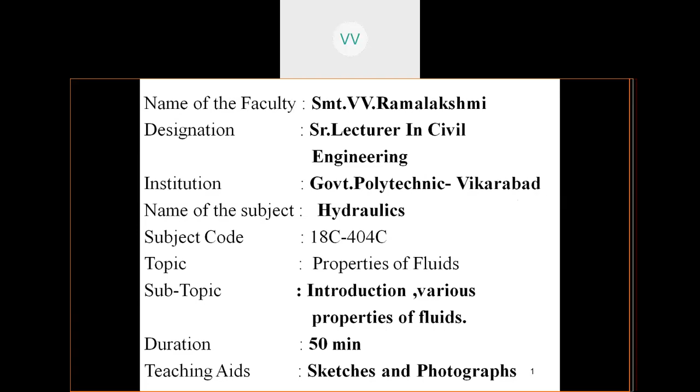Get ready to listen to the new subject of hydraulics. Hydraulics is a Greek word - hydra means water and leaks means study. So we are going to study about water in detail.

As you all are aware, water is available everywhere on the earth, but we have to streamline the water and try to utilize it properly. As a civil engineer, from our civil engineering point of view, we are supposed to take care of the water and use it effectively.

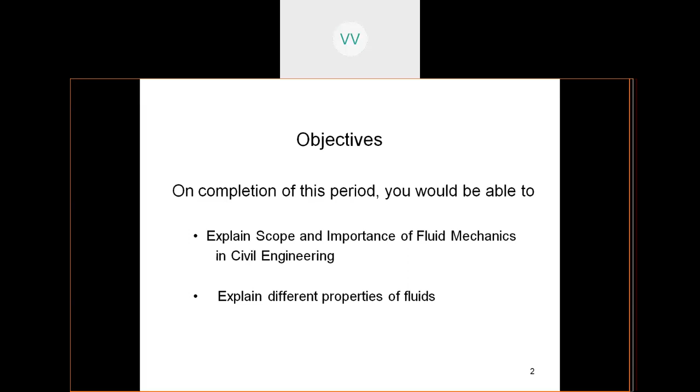On the completion of this period, the objective of the class is that you will be able to explain the scope and importance of fluid mechanics or hydraulics in civil engineering, and the different properties of the fluids. Next we are going to see the introduction to fluid mechanics.

As we are all aware, matter exists in two states - solid and liquid or fluid state. In the solid state, the solids are compact, rigid, and resist shear stress to its capacity, meaning the molecules are closely packed. This concept you already know from your school days in physics - matter exists in two states.

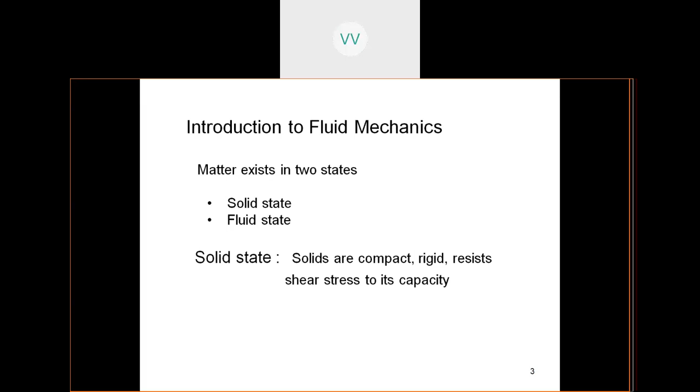Coming to the fluid state, it is a state in which the molecules are farther from each other, and a fluid is something which flows. Liquid is different from a fluid - both have a very slight difference. What you must understand is fluid means something which can flow. A state of fluid is the state in which it deforms continuously under shear stress. So that is the two states in which matter exists.

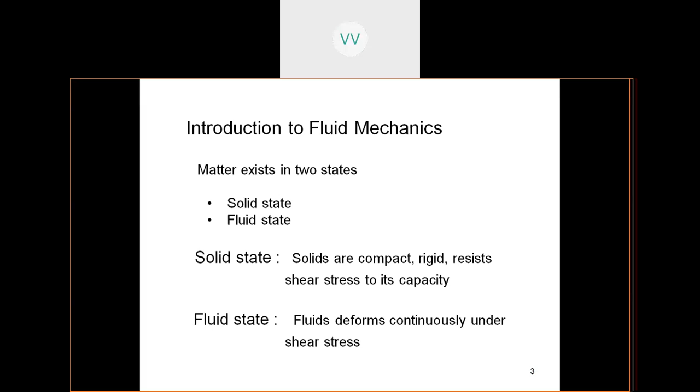Now coming to fluid mechanics - fluids may exist in liquid form or gaseous form, so both liquid and gas can be grouped into fluids. Now, liquids are something which possess definite volume and they are incompressible - that means we cannot compress them, the volume cannot be reduced.

Suppose you take a liquid into a cube and try to give pressure or forces from all sides. Can you reduce the volume of the liquid? Is it possible? No. You must have tried, or if you try also you cannot do it, because liquids are simply incompressible.

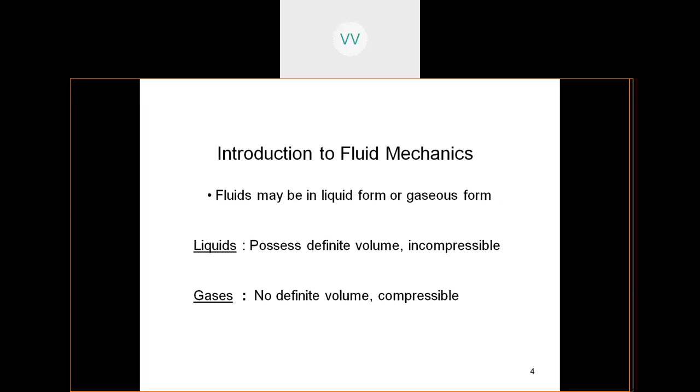Then coming to gases - you have oxygen everywhere, and unless you have oxygen you cannot breathe, but you cannot see it. Gases don't have a definite volume and they are compressible. Suppose you take some gas into a container and try to apply pressure to it - they can be compressed under certain conditions. So this is the basic difference between liquids and gases.

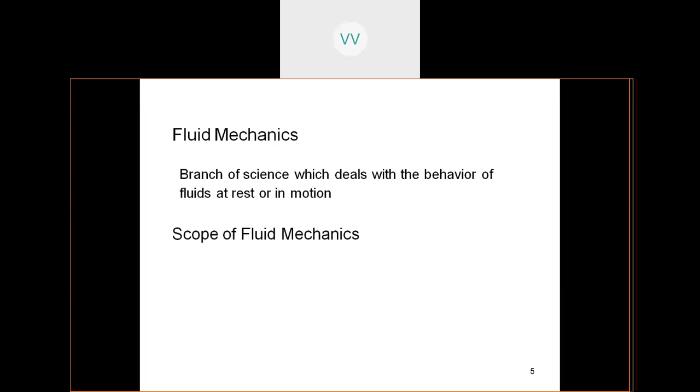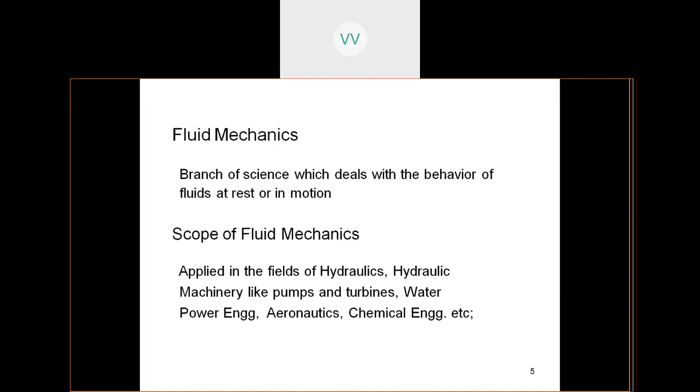Now coming to fluid mechanics - this is the branch of science which deals with the behavior of fluids at rest or in motion. Let us see the scope of fluid mechanics - it can be applied in the fields of hydraulics, hydraulic machinery like pumps and turbines, water power engineering, aeronautics, chemical engineering, etc. These are all the areas in which you have the application of fluid mechanics or hydraulics.

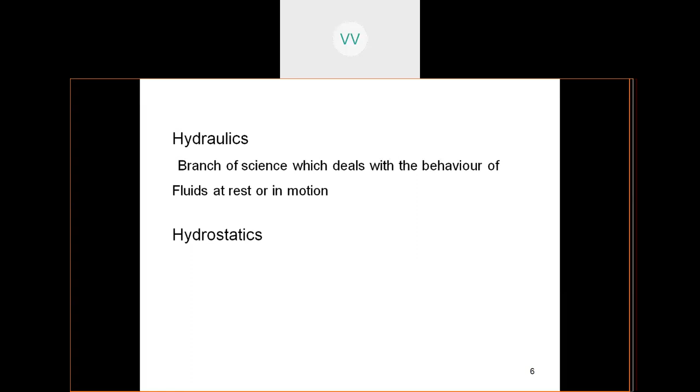So hydraulics, coming to our subject - this is the branch of science which deals with the behavior of fluids at rest or in motion. Then coming to hydrostatics - what is this hydrostatics? Static means something which cannot move, so hydrostatics is a branch of science which deals with the behavior of fluids at rest, when fluids are not going to move, they are standstill.

Then you have pressures - suppose you have the fluid inside the dam, which is getting barricaded by a dam, so it is still, the liquid is at rest - that branch is called hydrostatics. Then when the fluid is moving, like water running into a river, that is hydrodynamics.

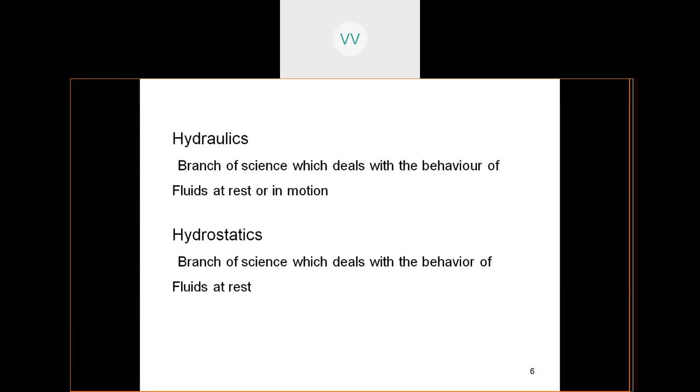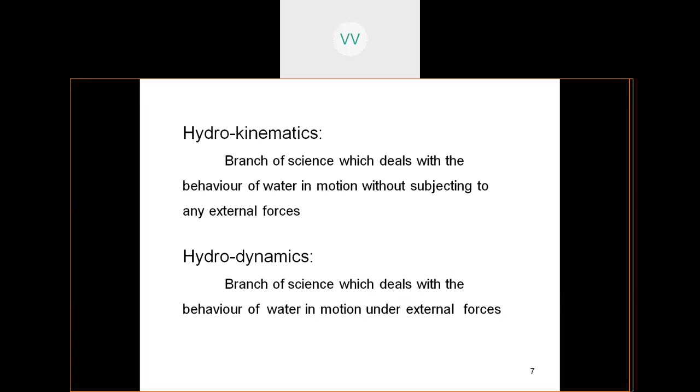Coming to kinematics, that is the branch of science in which the behavior of water in motion is studied without subjecting it to any external forces. That is hydrokinematics. Then coming to hydrodynamics, it is the branch of science which deals with the behavior of water in motion under external forces. So in kinematics, it is not subjected to any external forces, but in hydrodynamics, it is subjected to some external forces. So the effect or influence of external forces will be there in dynamics. That is the difference.

Now coming to the different properties of fluids. Basically fluids have certain properties, and unless we study these properties, we cannot understand the subject of hydraulics or fluid mechanics. Usually civil engineers handle the subject as hydraulics, and almost the same subject is handled by mechanical, automobile or other engineers as fluid mechanics, because the fluid which we deal with is going to be only water.

That is why hydraulics, hydro means water, as I told you in the beginning. For mechanical engineers it can be any oil because they deal with machinery, so they should know the movement of the oil, the viscosity of the oil, or the properties of the oil which is moving into the machinery. That is why in aerodynamics and similar fields, people study fluid dynamics or fluid mechanics. So the subject is a little bit different. From our point of view, we are going to restrict ourselves to hydraulics.

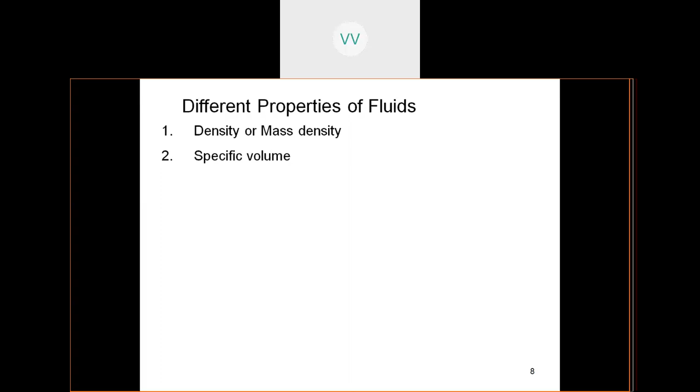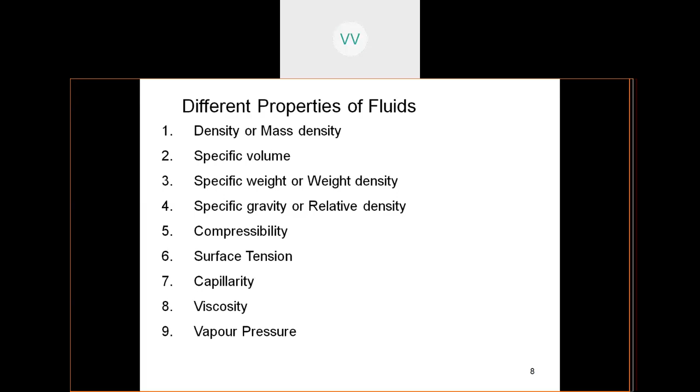Let us see the various properties of liquids. The first property is the density, also called mass density. Next, the specific volume. Then the third one is the specific weight or weight density. Then coming to the fourth one, it is the specific gravity or relative density. Some of these terms you must already be familiar with from physics or chemistry. Relative density, mass density, all these are terminology you have heard in physics or chemistry. Now coming to compressibility, the property of getting compressed. Then the next one is surface tension, and then capillarity, then viscosity, and the last one is vapor pressure. So this is the list of the various properties which a liquid possesses. Let us see them one by one.

So the first one is the mass density. It is represented by the Greek letter rho, a symbol very similar to small p. You must identify and know the terminology, what symbol is used for what. Mass density means it is the mass of the fluid per unit volume. The unit volume can be 1 centimeter, 1 meter, or any other unit like 1 feet. It is the mass of the fluid, that means the physical content of the fluid, per unit volume at standard temperature and pressure. These conditions have to be maintained. It is expressed in mass units, kilograms per meter cube. This is the mass density.

Then the specific volume. Sorry students, here the mass should be in kgs - by mistake the unit shown was kilonewtons, please correct it, it is kgs per meter cube. Meter cube is the unit volume, that is meter into meter into meter - L, B, D, with L in meters, B in meters, D in meters. Volume has 3 dimensions, so meter into meter into meter creates meter cube, and this gives kgs per meter cube. Then the next property is specific volume.

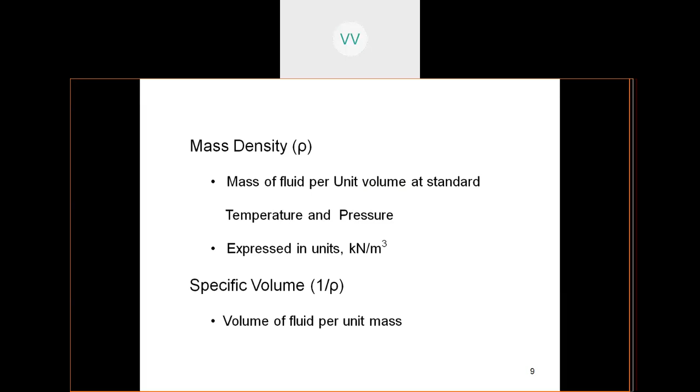Now students, the next property is the specific weight, and this is going to play an important role. Remember, this small w is going to be used in many places in our calculations in the subject of hydraulics.

So what does this small w stand for? It is the specific weight. Now weight means the force by which you are being attracted towards the center of the earth. All of you have your own weight, around 50, 60, or 70 kgs. Weight is always expressed in newtons because it's a force.

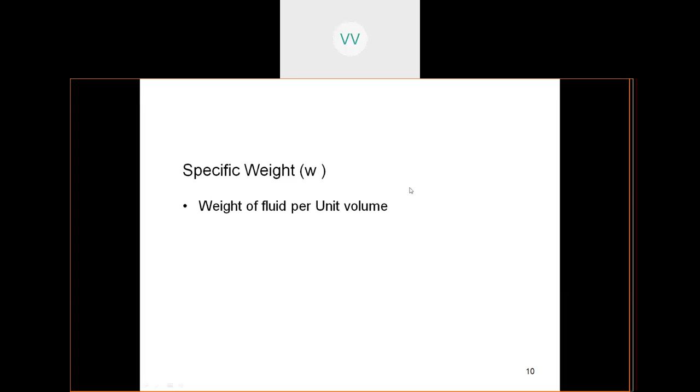Do you all remember Newton's second law? F is equal to ma. So weight is a force, so F is equal to m into a, that is mass into acceleration due to gravity. Here mass can also be expressed as mass density, so mass density is rho into g. So W is equal to rho g. This is one expression by which you can find out the specific weight.

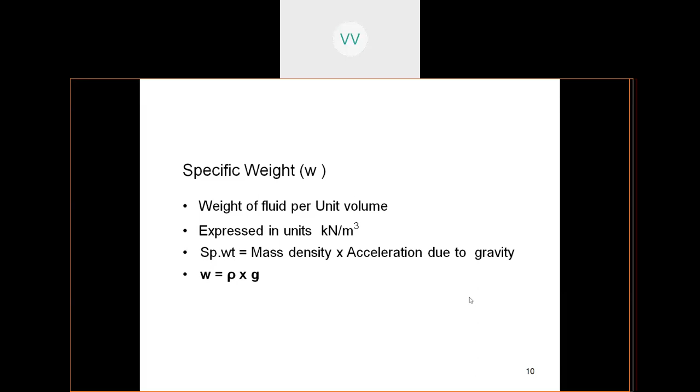Next is the specific gravity, expressed as small s. It is the ratio of the specific weight or density of that liquid to the specific weight or density of pure water at 4 degrees centigrade. That is the temperature at which the weight of water has to be taken, the ideal temperature. So whenever you want the specific gravity of a particular material, you have to compare it with a standard liquid, and the standard liquid available to us is water. So you take the ratio with water.

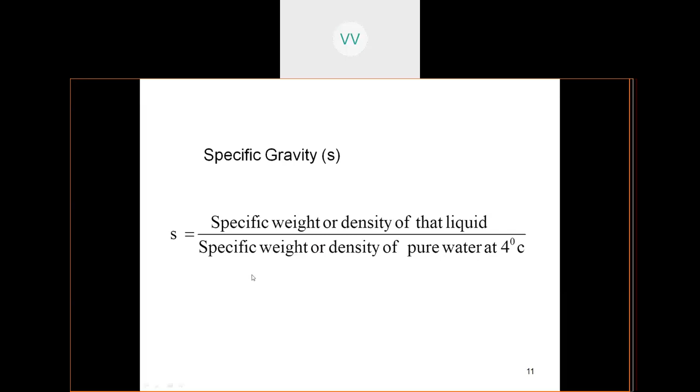Now let us see the standard values for liquids. The mass density rho is equal to 1000 kgs per meter cube, and the specific weight of water is 9810 newtons per meter cube. This value you have to remember, students. This is a very useful value which we will have to substitute in many equations in fluid mechanics or hydraulics. This value for water is a standard value, so you must remember it.

Next, mass density: this is 1000 kgs per meter cube. Then the specific gravity of water, S, is equal to 1, because when you compare the specific weight of a liquid with the same liquid, it is 1. Specific gravity of water is 1 gram per cc, you can take.

Then the specific gravity of mercury, because mercury is a heavy liquid. Usually you find mercury in thermometers, and also in mercury lamps. Inside the thermometer, for finding out temperature, we usually use it to get to know the outside room temperature, which is usually around 27 degrees centigrade. The specific gravity of mercury varies from 13.5 to 13.6. Usually for our problems we will take the value of 13.6.

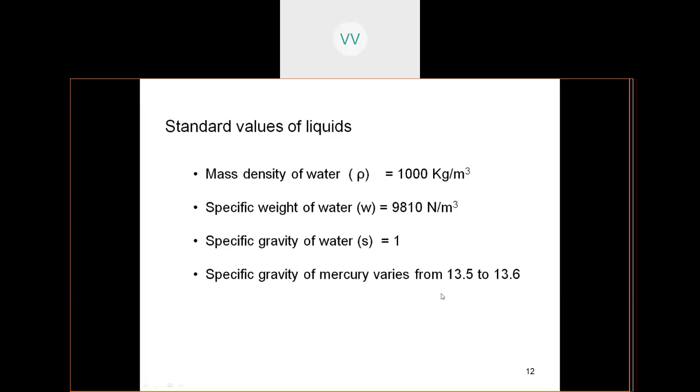Now let us go to the next property of the fluid, which is compressibility. It is very important - air is compressible. If you gather air and put it inside a box and close it, you can try to apply pressure and see, like a balloon. When you blow air into a balloon and tie a rubber band or thread, you can fly it up. So you have tried to compress the air and put it inside, and we see how the air is going to react - it will just fly because it is lightweight. So when coming to the property of compressibility, air is compressible.

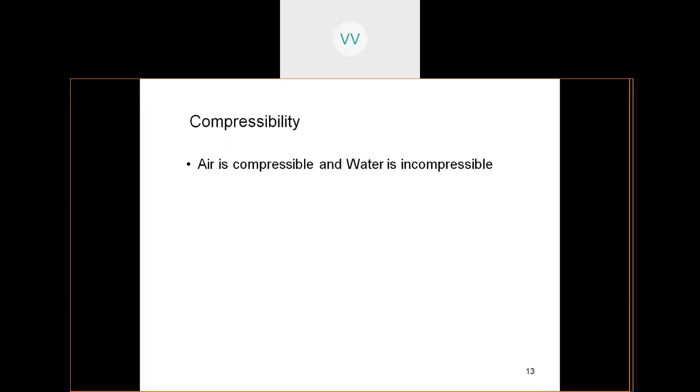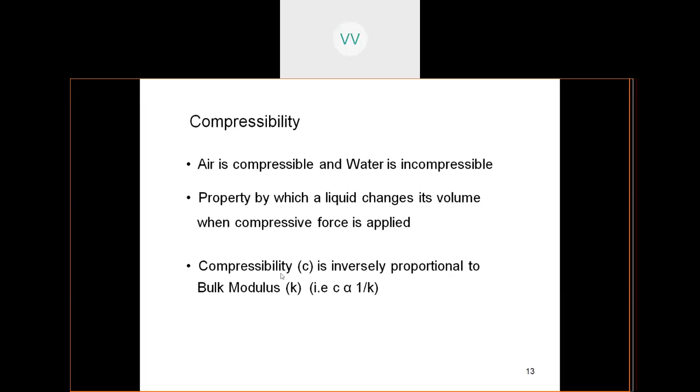Coming to water, water is incompressible. You just cannot compress water or try to reduce its volume by applying pressure. So let us take it for granted that water is incompressible. The property by which a liquid changes its volume when compressive force is applied is called compressibility. Compressibility is inversely proportional to the bulk modulus, which is related to volumetric change. So compressibility, small c, is proportional to 1 by k - when it is inversely proportional, you write it as 1 by k.

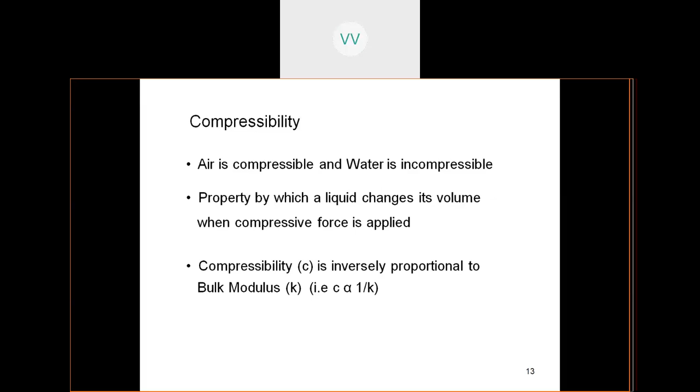So now let us see what is this bulk modulus. The bulk modulus K is equal to the ratio of increase in pressure per unit change in the volume per unit volume. So increase in the pressure, which is divided by the change in volume per unit volume. dV, small dV is the change in the volume, and unit volume is small v. So K is equal to dP by dV by V.

So dV by V is the volumetric strain, and this is the change in the pressure. So that is how when you apply pressure, you will have a small change in the volume. That change in the volume per unit original volume is the volumetric strain. So students, this is a relative term.

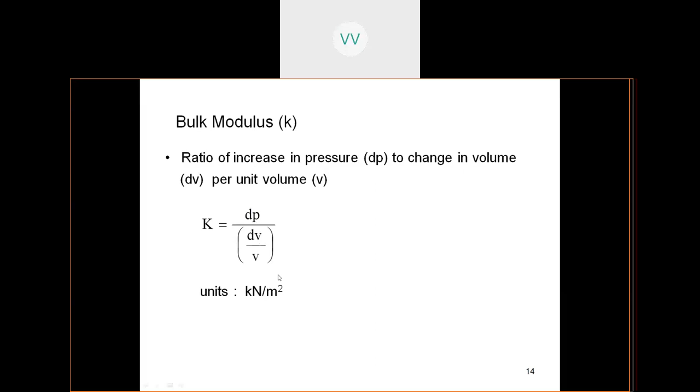Now pressure by volume: this is kilonewtons per meter square. The change in the volume is meter cube, and the original volume is also meter cube. So meter cube by meter cube, the unit gets cancelled off. So you remain with the unit of pressure, which is force per unit area. So here comes your units, kilonewtons per meter square. So the denominator unit is not going to reflect in your bulk modulus.

Another question which will come to your mind is, why does mercury, whose symbol is Hg, not wet the surface with which it is in contact, like glass? If you put mercury into a glass tube and remove it, it is not going to touch the surface of the glass. The same is not the case with water, whereas water wets the surface. Suppose you take a glass tube, put water inside and then pour it back out, you'll see some droplets sticking to the wall of the glass. So why does this happen for water and not for mercury? What property is associated with this phenomenon?

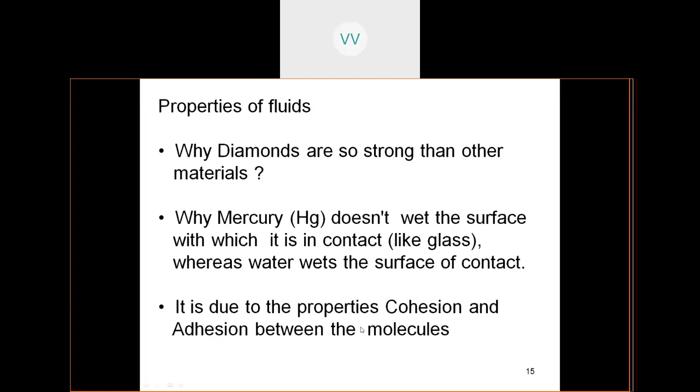Coming to liquids, the same terminology is applicable between the molecules of liquids. So let us see these two terms. In the properties of liquids, let us see adhesion: it is the property of the liquid by which the molecules of one liquid attract the molecules of another liquid or solid in contact with it.

Adhesion means sticking. So when you put water, the water molecule is different and the solid molecule, like the side of the wall of the vessel, is different. These two get attracted towards each other. So there is force of attraction between the liquid's own molecules and between liquid and solid molecules. This force of attraction, or this property of the liquid, is called adhesion.

Then coming to cohesion: it is the property of liquids by which molecules of the same liquid get attracted towards each other.

So suppose it is water molecules, two water molecules get attracted towards each other in the same liquid. This property is called cohesion. If it is different liquids, it is adhesion. But if it is the same liquid, it is cohesion.

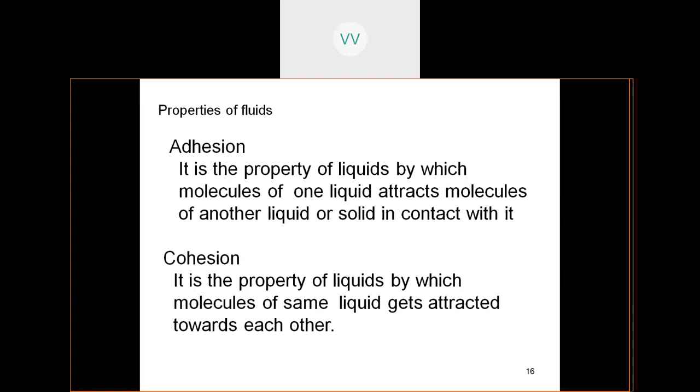Because of these two properties only, you have many phenomena associated with them. So let us again question ourselves. There are a few questions we'll have to think about.

So why does a drop of water assume the shape of a sphere? Whenever you see rain droplets coming down in the rainy season, you see them falling almost one by one drop. So how are they forming? How are they getting that shape? Because water has some property, otherwise it cannot take that shape, like a bundi, like the bundi of a laddu. So how is it getting formed in nature? God has created all these things, everything forms naturally. So what is the property behind it?

Let us see another question, students. Why are small insects able to skate across the surface of a pond? They are not swimming, because they are lightweight. Suppose you see a dry leaf on the surface of the water without sinking, or some small objects are able to just stay on top of the liquid. So how are all these things happening?

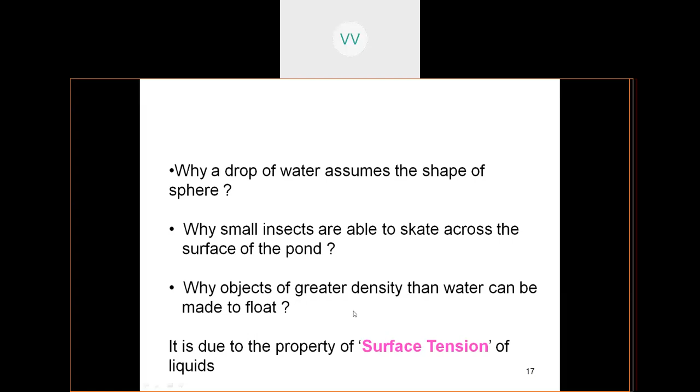This is another new property which we are going to learn about. Because of all these questions — water droplets forming, small insects skating on the surface, and objects of greater density than water made to float — it is all happening because of the surface tension of liquids.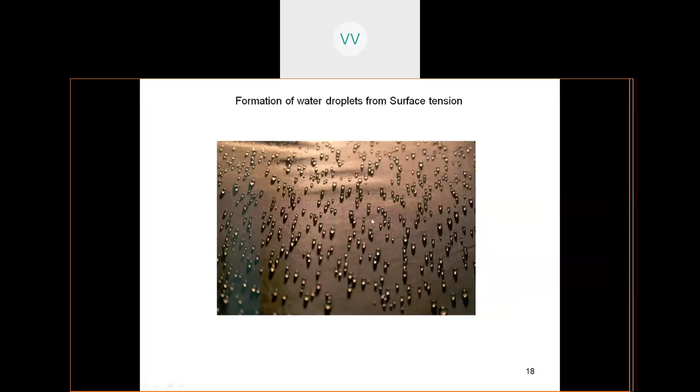Now let us look at this picture showing the formation of small droplets due to surface tension. Water droplets are formed because of surface tension. On a surface you can see all these small and big water droplets. This shape, this look, is very magnificent, and this happens in our day-to-day life. We see this situation when water is in the form of droplets. So because of surface tension only, water can take this form.

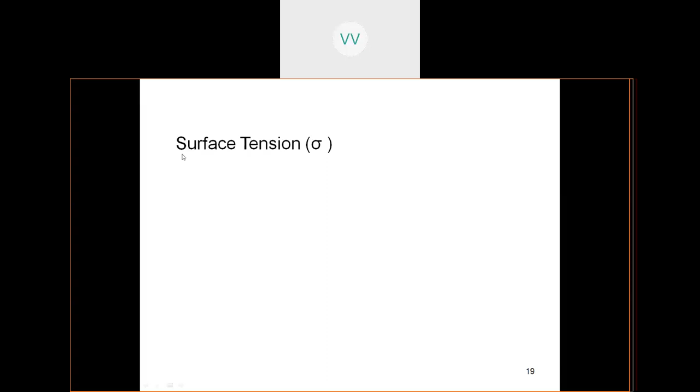Next, let us see, students, what is this surface tension? We have seen different types of tensions. In engineering mechanics, you have seen tensile force, which elongates a body. Because this tension is created on the surface, it is called surface tension. It is defined as the tensile force acting on the surface of the liquid per unit length — let it be 1 meter, 1 centimeter or 1 foot. This is the surface tension, represented by the symbol sigma.

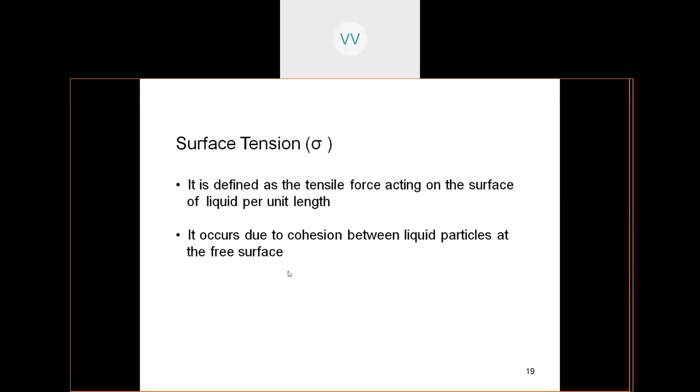Now, why does it occur? It occurs due to the cohesion between the liquid particles at the free surface. Now I'm going to give you a view of the molecules, what is actually happening internally. You'll be able to visualize it by looking at this picture.

The surface tension of liquids decreases with the increase in temperature. Suppose you take water — when you boil it, as you increase the temperature, the molecules scatter. So the elasticity or force on the surface of the liquid lessens with increasing temperature. When the temperature increases, because of the heat, the molecules separate and scatter. So the surface tension of liquids decreases with increase in temperature. Remember this concept — it is inversely proportional.

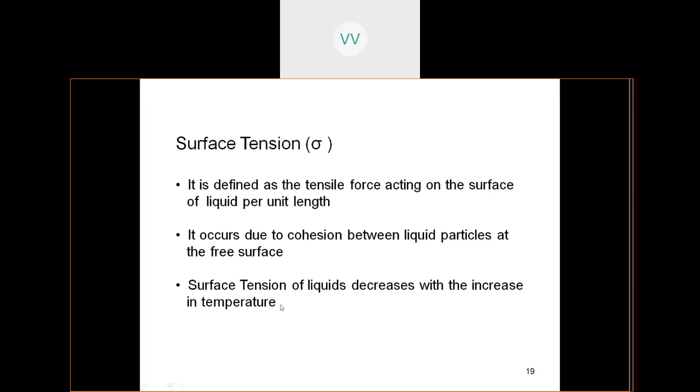Now let us see the phenomena of surface tension. Look here, this is a container, and this is the top liquid surface. So this is the surface.

Consider a molecule A which is inside or under the top, inside the water. It has forces in all directions, see the 8 directions you have forces. So this molecule can attract any molecule in and around this area.

Now coming to this surface, at the top side you don't have anything. There is atmospheric pressure, it is open, the top liquid surface is open to the atmosphere. So what is happening? You have forces of attraction only to the side and the bottom, not to the top. So here this is one side and this is the other side.

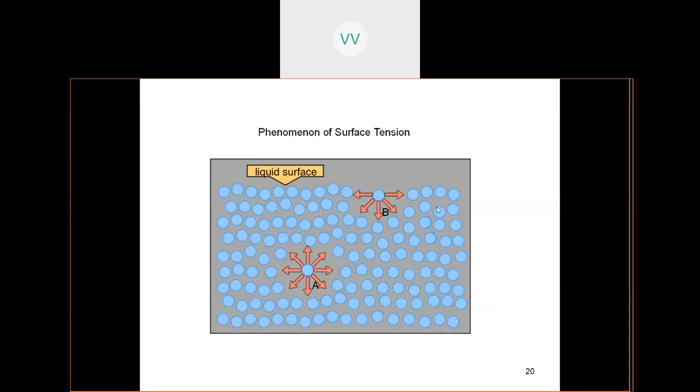This molecule is being pulled by forces on either side, that is, it is under tension. Because this molecule exists on the top liquid surface, this force is called surface tension. Is it clear, students? So you consider one molecule inside and one molecule on the surface, and both these molecules have different forces. It is clear from this picture, and you can explain the concept with the help of a sketch like this.

Now coming over to surface tension: the magnitude of the force per unit length of the free surface will have the same value as the surface energy per unit area. So surface tension is expressed in Newton per meter, that is force by length, Newton per meter.

Now let us see the application of surface tension on a liquid droplet, how it is formed. Let sigma be the surface tension of the liquid per unit length in Newton per meter. Then small p is equal to the pressure difference between inside and outside of the droplet. So Pi is the pressure inside, which is more than the external pressure Po. This is the bubble, and if you take the semicircle, half of the bubble, at the surface.

If you take half the surface, you have tension towards the bottom. So the internal pressure acts downwards and keeps the bubble in spherical form. Because there is more pressure inside and less pressure outside, the film is going to be formed and sustained.

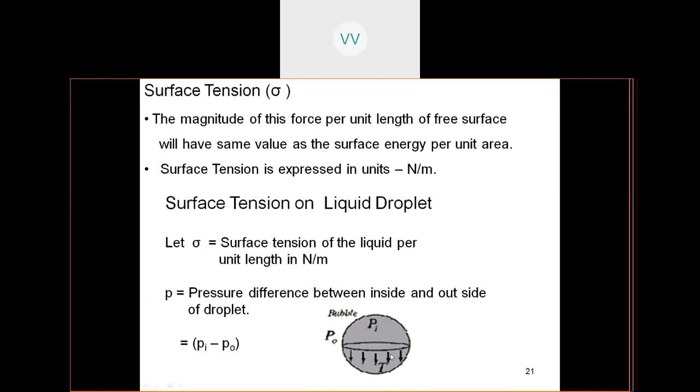Look here, this is the phenomena or concept behind it, this is the tension. Now under equilibrium conditions, the tensile force due to surface tension acting around the circumference of the cut portion is sigma into pi d, because it acts around the circumference, you take the circumferential length, that is the perimeter, pi into d. And the pressure force is acting around the area, that is the cross sectional area, pi d square by 4 into small p.

So this inside force has to balance the cut portion. Sigma into pi d is equal to small p into pi d square by 4. So p is equal to, pi gets cancelled and one d gets cancelled, and you land with p is equal to 4 sigma by d. This is the equation for the pressure inside a droplet.

This is the surface tension on a liquid droplet, and now the surface tension in a hollow bubble or soap bubble will have two surfaces in contact with the air. If it is a hollow bubble, there is the internal circle and the external circle, so two circumferences are there, it is like a ring.

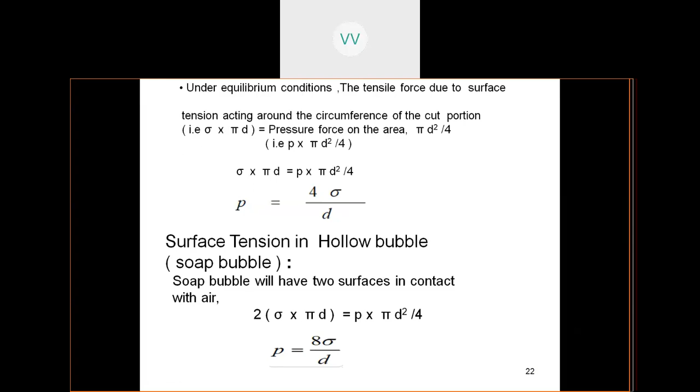For droplet, it is 4 times the surface tension by d, and for hollow bubble, because it is hollow, there is an internal diameter and an external diameter. Because double the area is exposed, we take it as 4 to 8 times. So bubble is 8 times sigma by D.

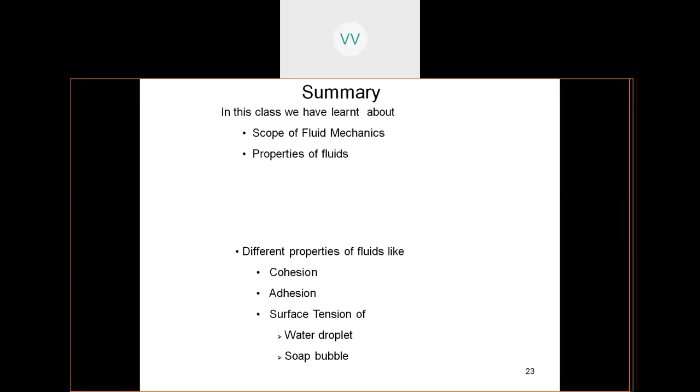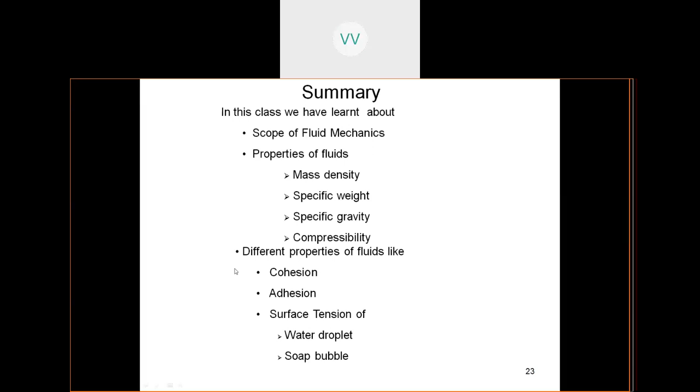Now let us see a few questions in the quiz. Specific volume is the reciprocal of: mass density, specific weight, compressibility, or specific gravity. What is the correct answer? The answer is A, mass density.

Then, the specific gravity of water at standard temperature - how much is it? 0, 1, 2, or 3? Specific gravity is a comparison between the specific weight of a liquid and that of standard water. So when comparing water with water, you get 1. So the answer is B.

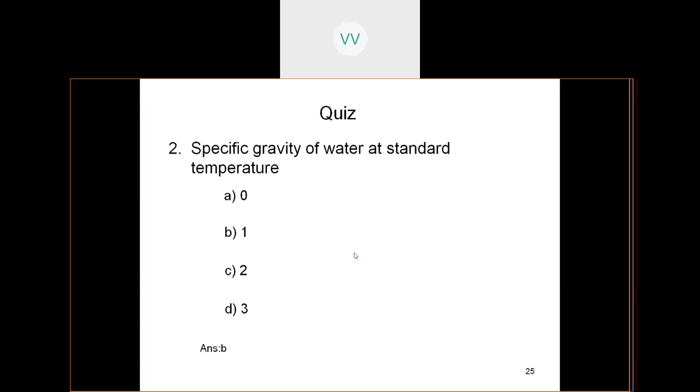Now the third question: which of the following is incompressible, air or water? We discussed in the beginning about the compressibility property. Air can be compressed and water cannot be compressed. So water is incompressible. The answer is B.

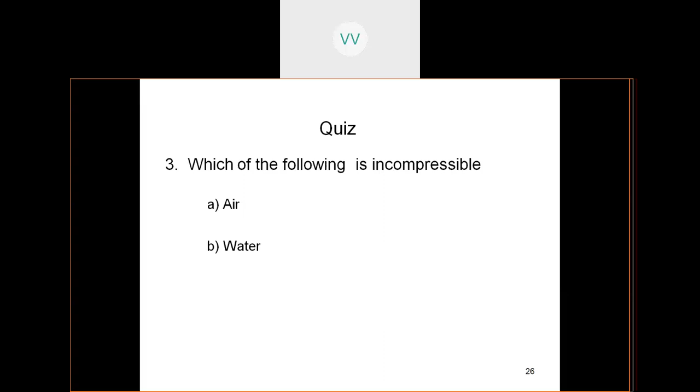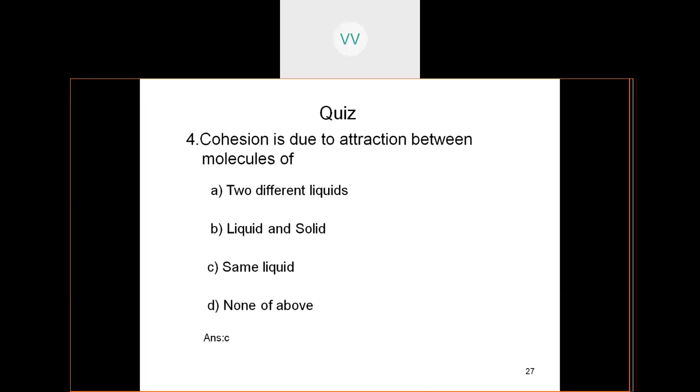Now, what is cohesion? Is it due to attraction between molecules of two different liquids, liquid and solid, same liquid, or none of the above? The answer is same liquid. Co means same, like colleagues, collinear - co means same. So select answer C.

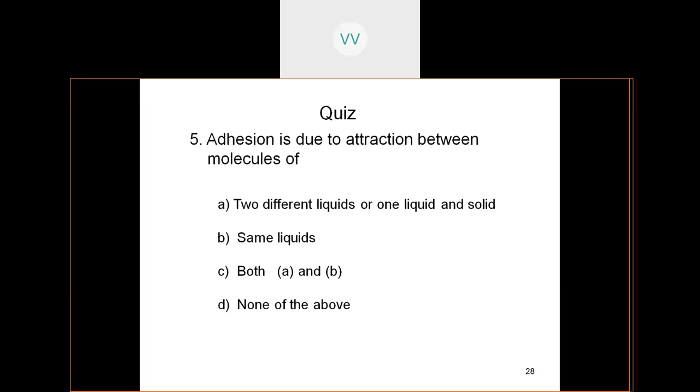Now coming to the next question: adhesion is the force of attraction between two different liquids or one liquid and solid, same liquids, both A and B, or none of the above? The answer is A, two different liquids or one liquid and solid.

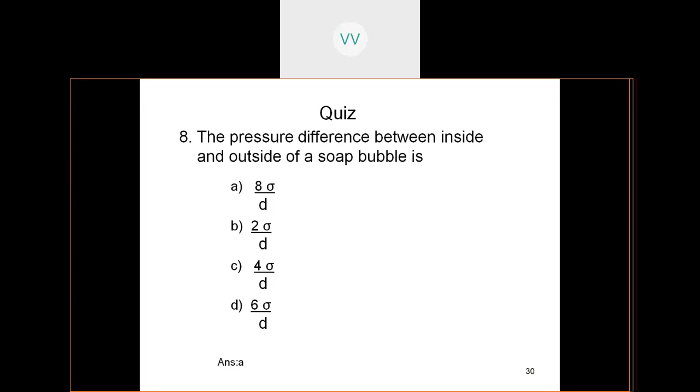Then, the pressure difference inside and outside of a soap bubble is: 8 sigma by D, 2 sigma by D, 4 sigma by D, or 6 sigma by D? The answer is 8 sigma by D, because a soap bubble has internal and external surfaces - two circumferences are involved.

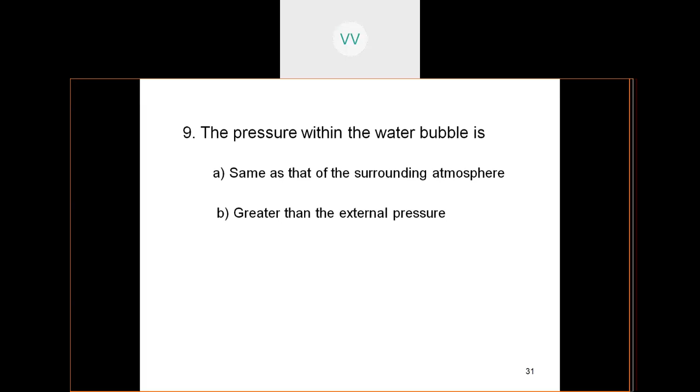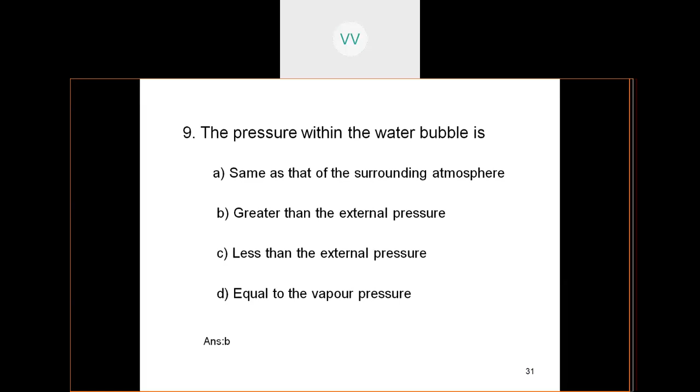So the pressure within a water bubble is: same as the surrounding atmosphere, greater than the external pressure, less than the external pressure, or equal to the vapor pressure? Remember that bubble figure and you will answer correctly - it is greater than the external pressure. The answer is B.

Now let us see the frequently asked questions in this chapter. Define specific weight and specific volume. Define specific gravity and compressibility. Define cohesion and adhesion. Define surface tension. All these are possible answers asked in the exam.

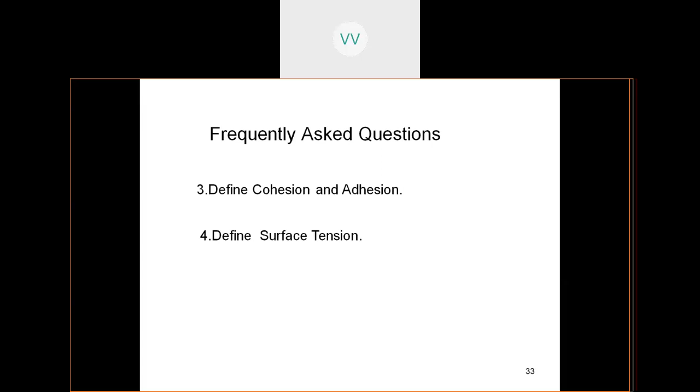What is meant by surface tension? Give two examples of surface tension. So with this, students, we have finished a portion of the first chapter, the properties of fluids. Answer the questions given after going home, and write down some more examples of surface tension, as these will come as definitions. Definitely write down all the definitions of the properties of liquids.